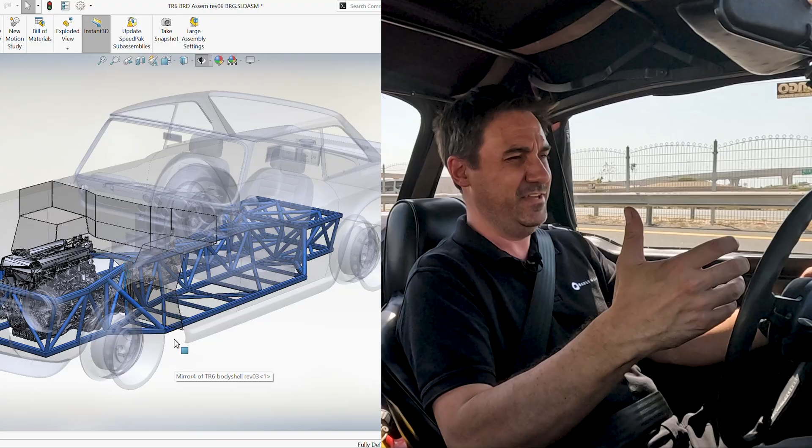The wide body, yes, it's about making the car look a certain way, of course, but it's the chassis underneath that is asking for more room, to get a different wheel and tyre package under the car, and to get a bit more chassis track width. So the chassis and the wide body are interrelated, and that also runs a thread through lightweight, that the wide body panels in carbon fibre together with the roof, the hardtop and the boot lid will give a significant weight reduction in the car.

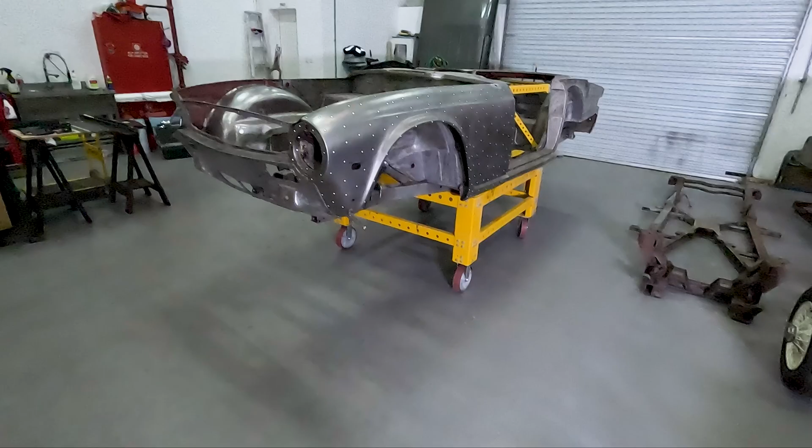Now, the chassis for TR6 BRD will be an all-new space frame chassis. It's really where the project started, to design an all-new chassis for the car. The original box section, planar frame of the original is replaced in its entirety with a space frame chassis. Of course, with a change in torsional stiffness from the new chassis, which will really change how the car feels to drive and ultimately how it handles. The new chassis allows us to do a number of key things.

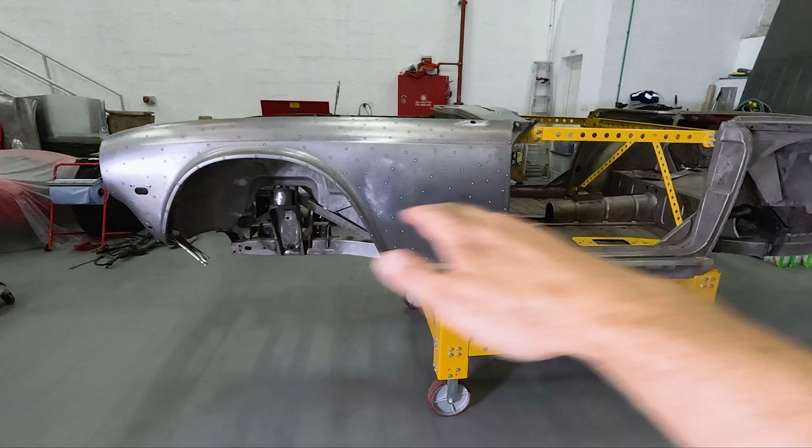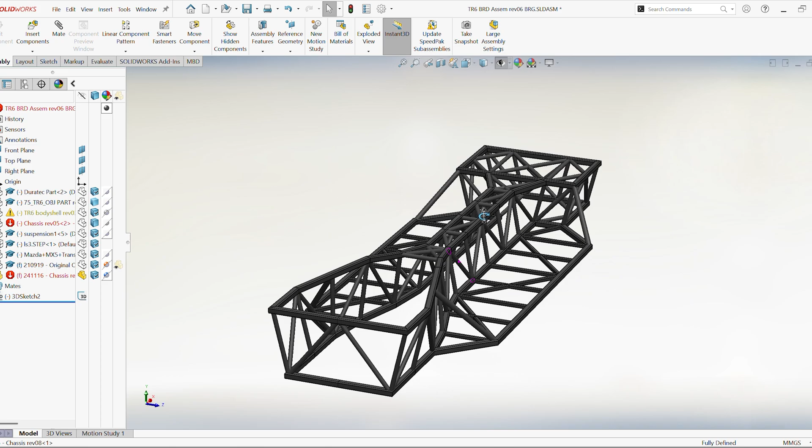It allows us to, first and foremost, reset the static ride height of the car, so we can revisit the relationship between where the bottom of the chassis is versus where the centre line of the wheels lie, and where the body shell is then sitting. And really that's to put back into the chassis the lost articulation and the unwanted change on the control arm angles that happen when you lower a TR6 from its stock chassis geometry.

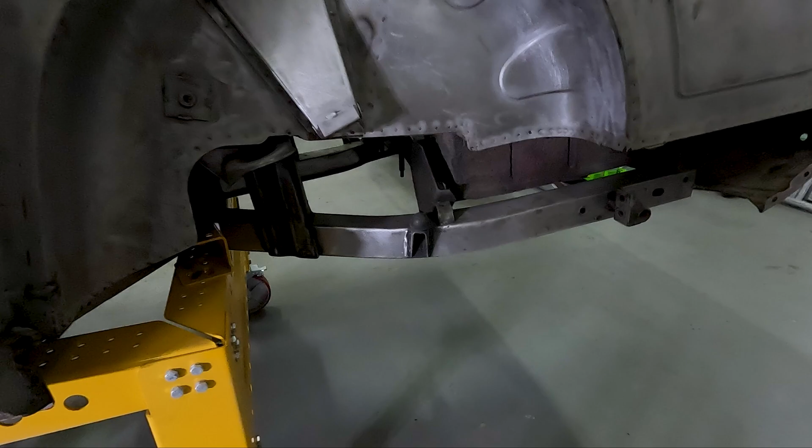We're also introducing a full double wishbone setup at the rear, which I'll talk more about. The original car has a trailing arm with originally an Armstrong lever arm damper. You can use telescoping dampers, but it's a bit tricky to do and brings some other compromises. But the new chassis allows us to have a complete box out here that will house more robustly the diff, along with the new double wishbone control arms, and on all four corners a more conventional spring and damper setup, coilover setup ideally, so we can fine tune everything from spring and damper rates to ride height, which is a little bit tricky to do on the original car.

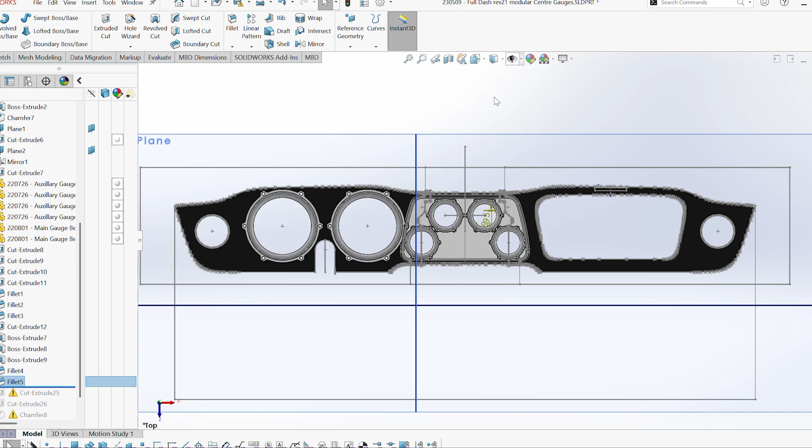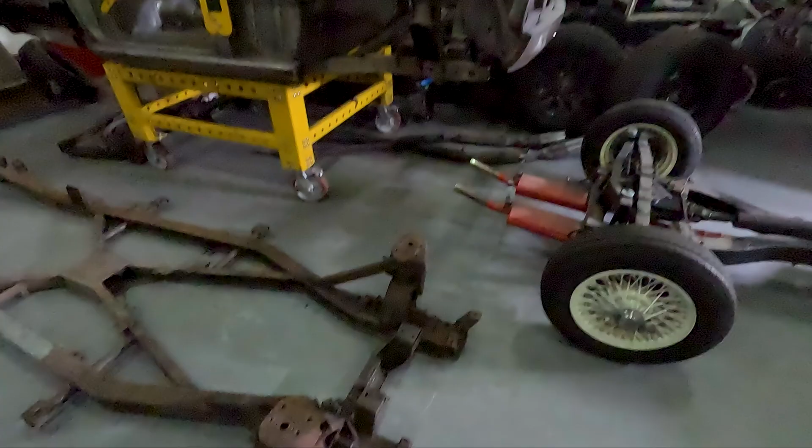Now, with the wide body work largely complete for the exterior look of the car, Neil McLaughlin, our automotive illustrator, is now moving on to the interior work of the car, and I've shared some initial ideas with him on changes we'd like to make on the inside of the car. One of the spoilers that I'm sure I will be giving an update on in due course is to try to lower the seat a little bit in the car, and we're going to be doing that in conjunction with the chassis. On the original car, this is a TR4 frame, but it's the same principle.

You have a diagonal that runs, you can just see it here, under the seat, so you can't necessarily lower the seat on a stock TR6. But with a new chassis, we can avoid that area and locally have a depression in the body shell and get the driver and the passenger a little bit more hunkered down in the car, and just improve the ergonomics and give you a bit more room in the car fundamentally.

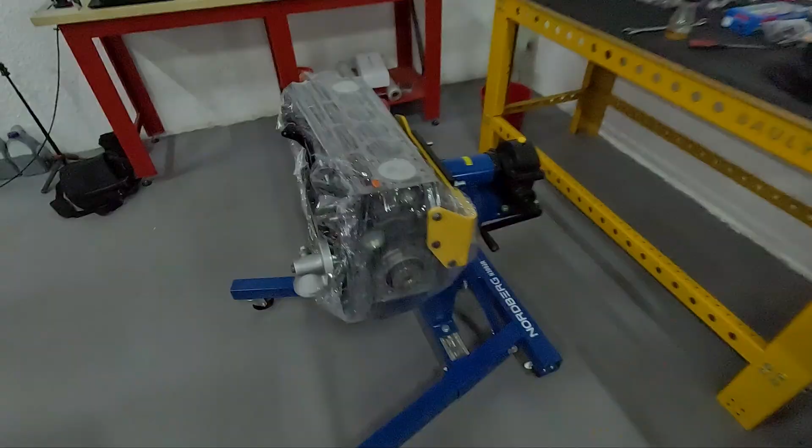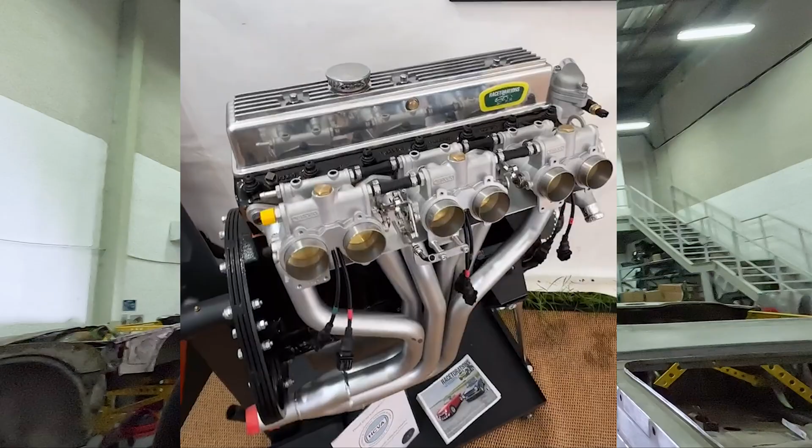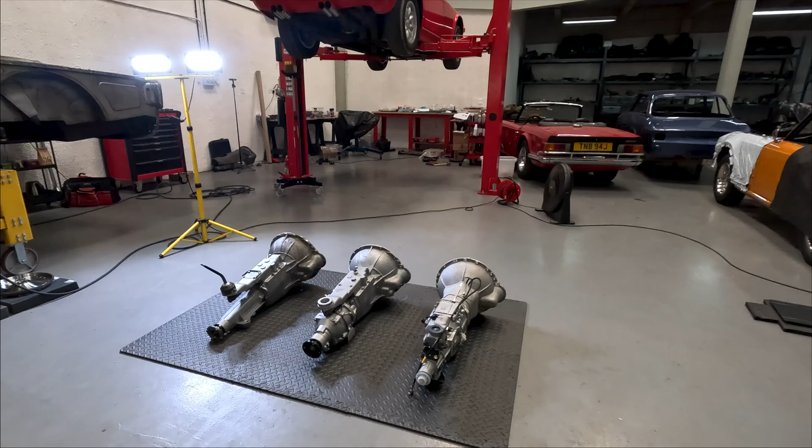Now, engine and drivetrain, of course. The engines for TR6B, we're talking to Racetorations in the UK about building a road-going version of one of their competition spec motors. I won't give the game away on the spec for that engine just yet, but I'll give an update on that in due course. Should be pretty special. The gearbox, we're looking at options from the original 4-speed, a competition-derived version of the 4-speed, with or without overdrive, and of course some 5 and 6-speed options as well, so stay tuned for that.

So that's TR6B. I hope that gives a better idea of what the car's all about. I will carry on giving updates on the design progress of the car.